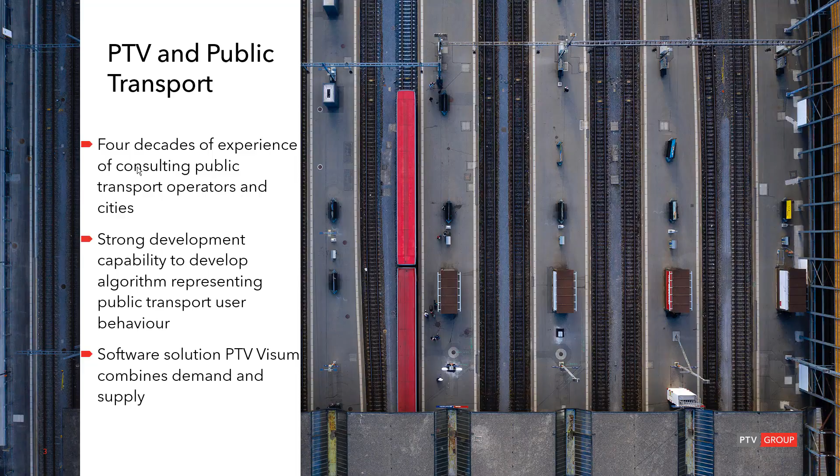So PTV Visum combines the view of the passenger with the view of the operator. It is bringing the demand and the supply side of a public transport system together. What this means, I will describe in the following slide. A transport model integrated in PTV Visum replicates basically the behavior and the choices when PT services change. Depending on the attractiveness of the system, the alternative options and the choice behavior of the population, the passenger demand can then be calculated with the transport model.

Based on the demand, you can determine a timetable and optimize your vehicle scheduling. When you look at your vehicle scheduling, you might find a better timetable to reduce the number of vehicles and therefore reduce your operational cost. So basically, the software allows you to attribute the cost to specific services. By reducing or increasing the number of services, you can then see the impact on the demand.

So PTV Visum can help you to balance, on the one hand, the impact of the operational optimization to reduce your cost, but also how to improve your system to increase the number of passengers. So it's basically a balance. Once you optimize your service quality and have fewer services, it could happen that because of the fewer services you have fewer passengers, but it all can be balanced out with Visum.

Before we discuss our 10 key topics, I'd like to hand over to Sebastian, who will provide you with a general overview on PTV Visum with public transport in a live demo.

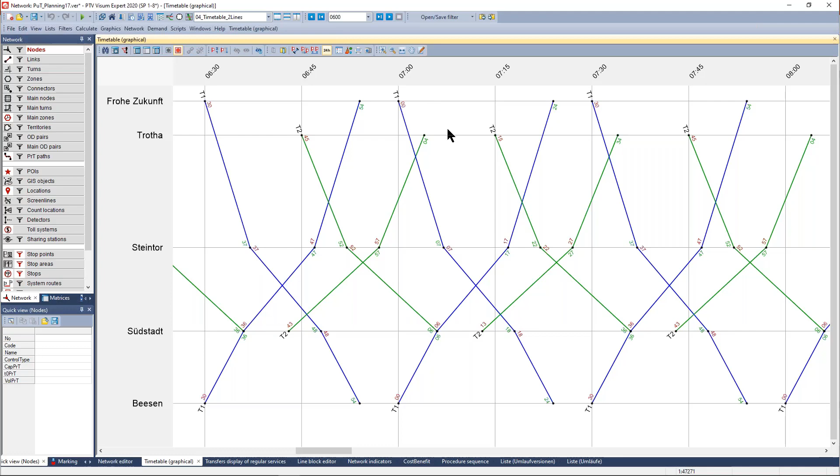This is our graphical representation of a timetable, and here you see two lines, a green line and a blue line, with selected stops of their journey. You also see the arrival and departure times. In addition to this, we have something we call a schematic line diagram. It visualizes the supply in a schematic manner.

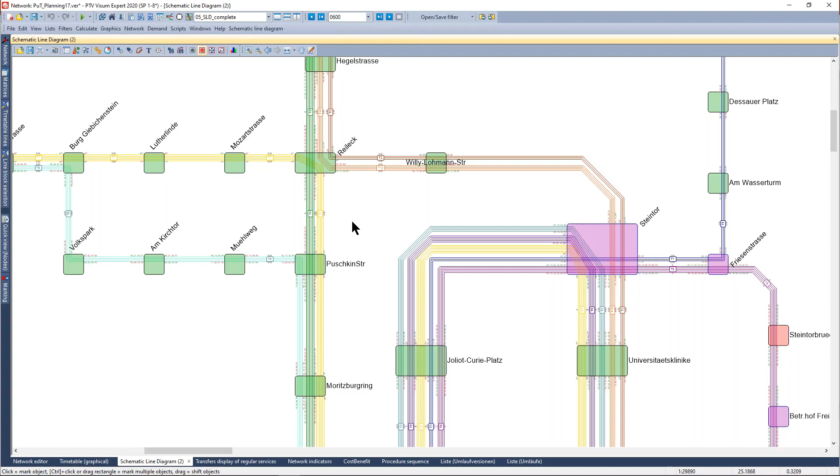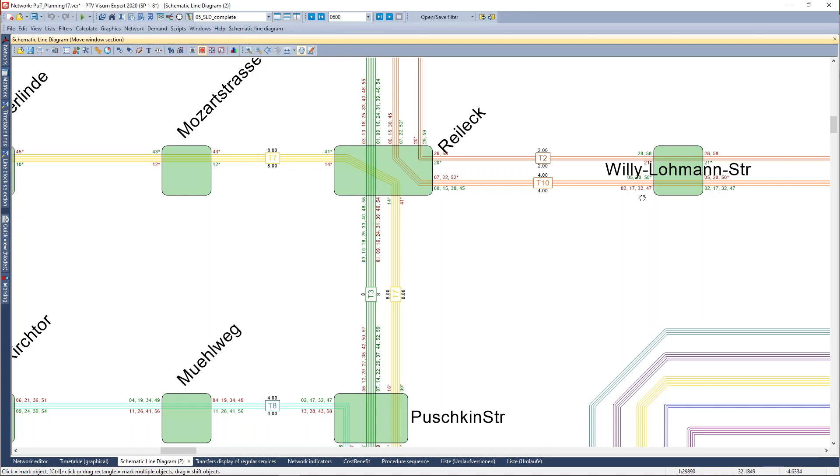If you want to plan your supply, you want to have the stops, the frequencies, and the connections in mind. This schematic line diagram summarizes all this. The width of the edges depicts the frequency of the supply. The figures at the stops represent the arrival or departure minute of the journeys, and this makes it easy to assess the transfer conditions at each stop.

So this is short for the supply side, and of course we want to have a look at the demand. In a macroscopic transportation model, the demand is most times represented in matrices. Our small example here consists of 90 zones, so we have 90 by 90 OD pairs to fill. This data comes from passenger surveys or from classical demand modeling. If you want to learn more about this, you can have a look at our webinars about the survey data model.

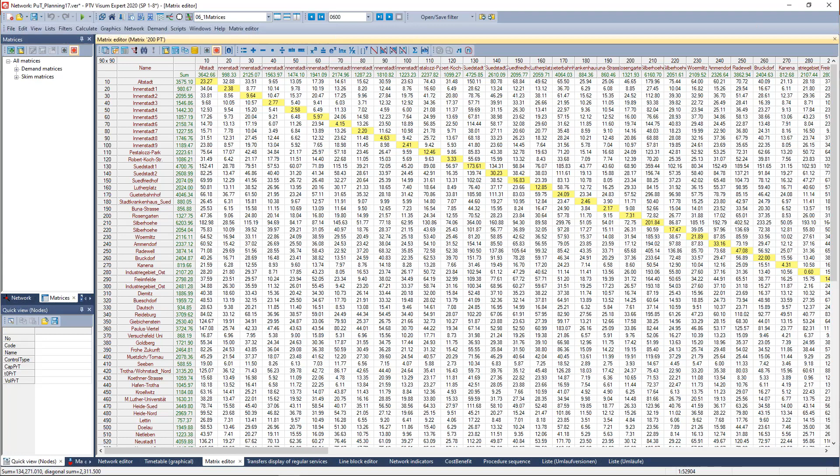Now we saw the supply and the demand and how they are represented in PTV Visum. Let us now switch to the assignment. The assignment brings together the demand and the supply. It includes route search, impedance calculation, and choice. To show this, I restrict the supply to two lines, the green line and the blue line, and I run an assignment.

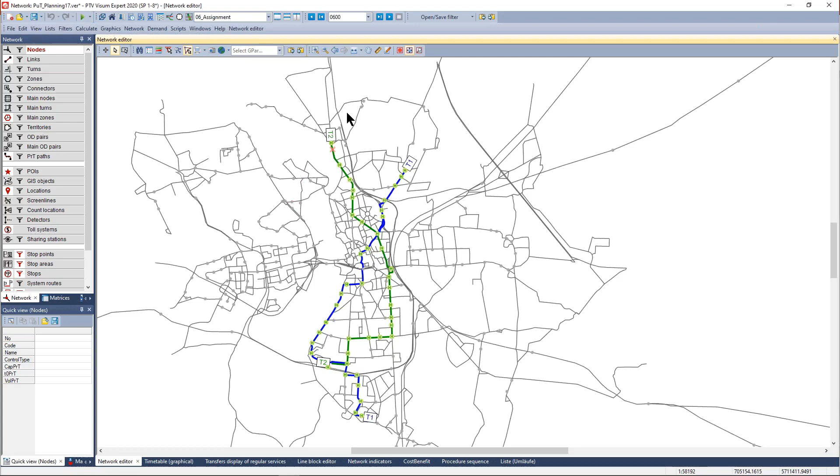The results can be accessed in multiple ways. Here you can see the most common way, with line bars, to see how many people are using the green line and the blue line. Our graphical timetable can also display the number of passengers using a particular bus or train trip, as vehicle journeys. It is color coded: green means every passenger finds a seat, orange means the volume is higher than the seating capacity, and red means the vehicle capacity wouldn't be sufficient for that amount of passengers.

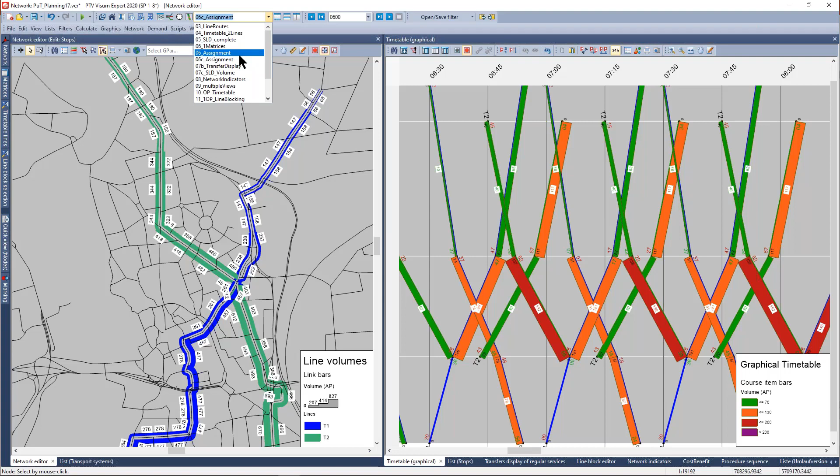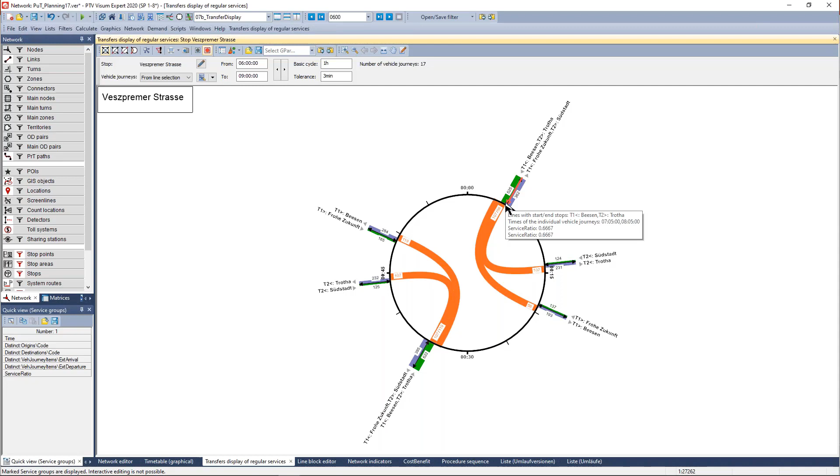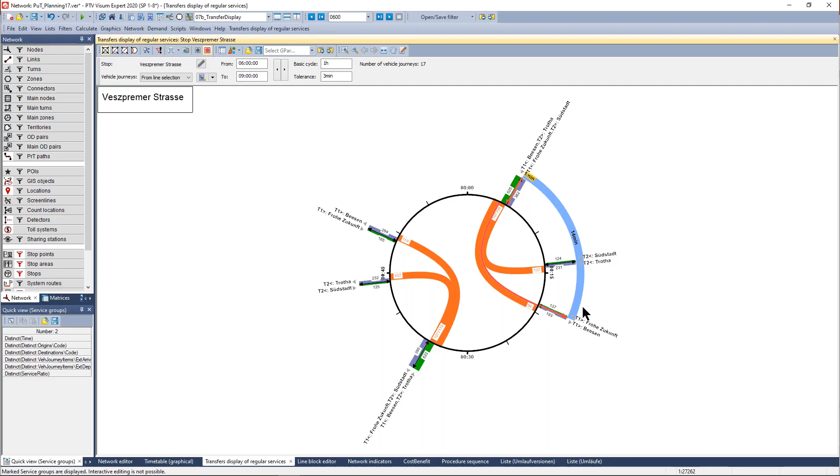If you are more focused on transfers, PTV Visum has something we call a transfer display. You see this on a stop level. This is kind of a clock where arriving and departure minutes are depicted in a circle segment. This is most helpful if you want to see the transfers. Here you see the time you need for the transfer, and then you see you have 13 minutes of waiting time for this connection, and how many people are using it.

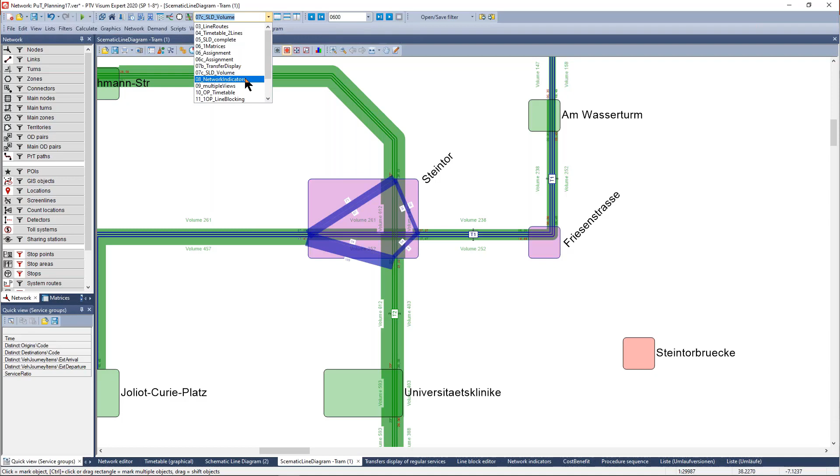If you have done an assignment, you can look up the demand in your schematic line diagram as well, and you can also depict the transfers here. Of course, these are all graphical visualizations without a lot of numbers, but you can access those numbers as well through what we call network indicators, so matrices and formula matrices. In this case, I put in the transfer time multiplied by the passengers, and you can access this for comparing scenarios afterwards.

And everything I showed you before is integrated in one program, and this comes with a lot of advantages. There is synchronization between all those views. So if I click here on different stops, the transfer display will automatically switch to the one. If I click here on journeys, you will see them in the network editor and marked here in the transfer display as well, and in the schematic line diagrams.

So synchronization is one of the main advantages, but more important maybe, everything here is based on one data set. So if you change something in one view, the results will be immediately shown in the other view as well. Okay, we talked about demand, supply, and assignment. Everything like this is the passenger perspective.

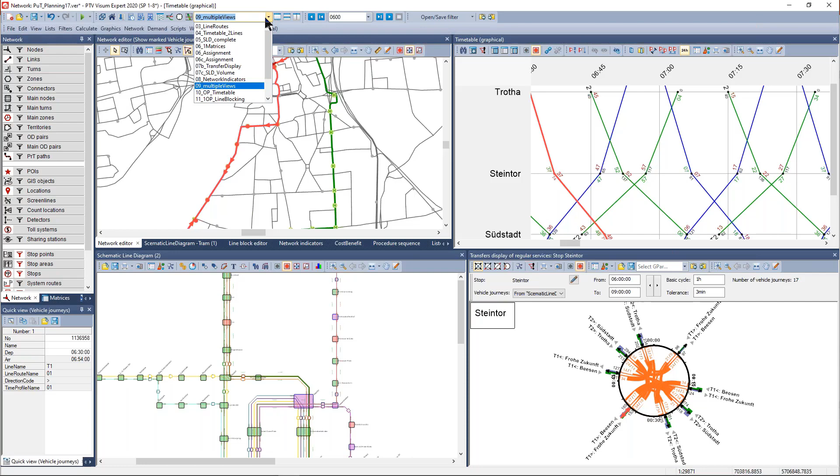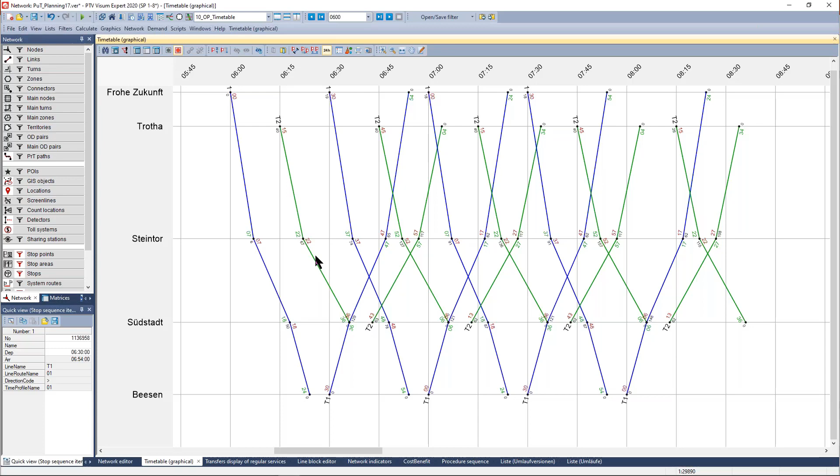But Visum, as Andreas already told you, also offers the operator perspective, and for this you see here the timetable, and this timetable is from the operator perspective a good timetable. You have enough preparation time for each trip, blue and the green line. But if you look up close, you will see there is an uneven number of green journeys in here. So if you see this as an operator, you know you have to have an empty trip or a dead run in your system, and that's exactly what we can do by line blocking.

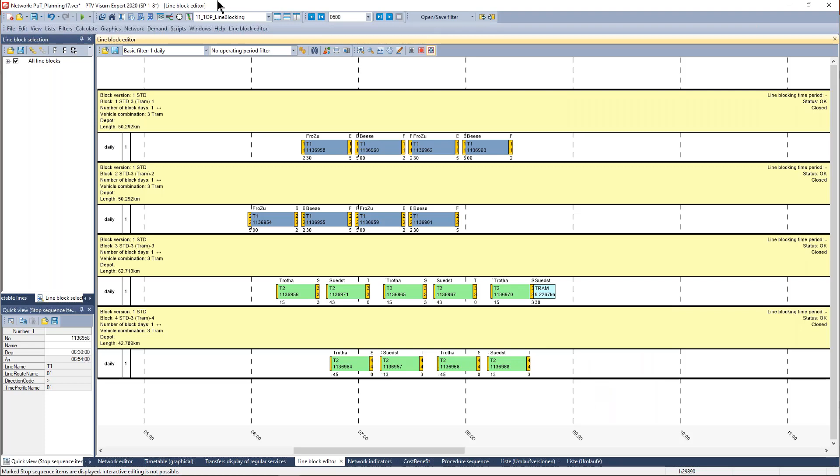We can calculate how many vehicles are needed to operate this timetable. And by this, you can estimate the cost of this timetable. In here, this is our line block editor, or maybe you know it under the name vehicle scheduling. You see, with 4 vehicles you can operate this small timetable, and you see here the dead run for the green line. And of course, results like this you can also look up in your timetable to see which bus operates which journey in your timetable.

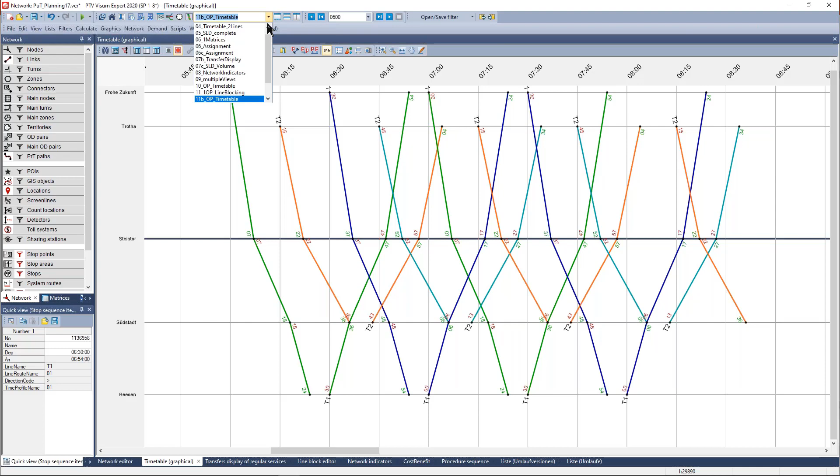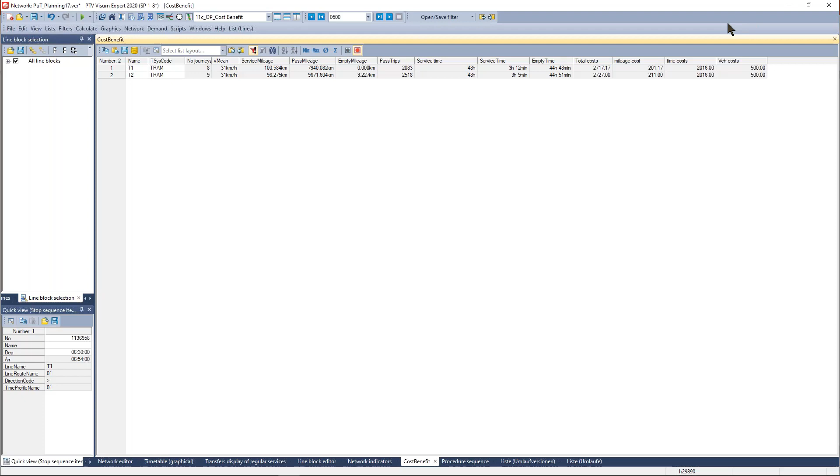Okay, and of course, if you have the number of vehicles, you can estimate the service mileage, the empty mileage, the service time, and of course the mileage cost, the time cost, and the vehicle costs. So you know what your operating cost is for having this timetable in place. Okay, and we saw we have about 500 money units of vehicle costs in here, and I want to show you a short example of how to optimize all this.

So what we see here is, as I already mentioned, a good timetable from operator perspective, where you have enough preparation time for each journey. But if you want to transfer at this major stop Steintor here, there is a lot of waiting time involved for the passengers. And if we want to reduce this, we can change the offset of the timetable. And you immediately see there is something happening in our line blocking. And last one here. Okay, and now every trip will meet each other at Steintor, so the transfer time is minimized.

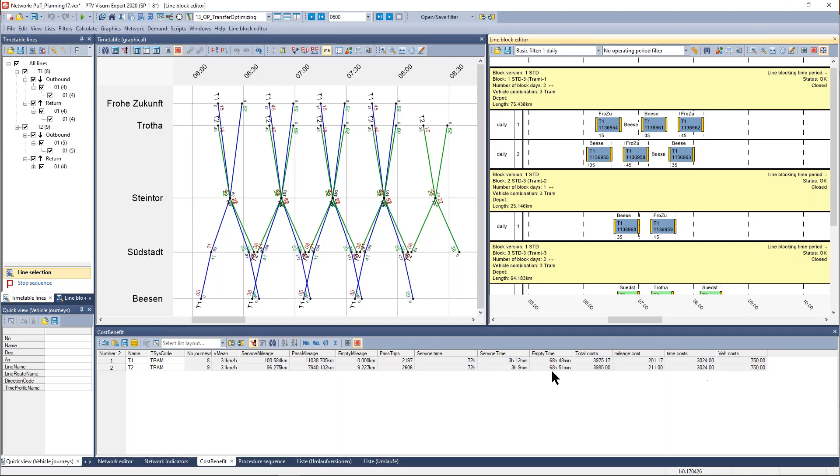And when I now rerun the calculation, you will see I need 6 vehicles now. And this will, of course, bring up my vehicle cost to 750 money units. So you see what it costs more in operation, but you can also look up what it will gain for the passengers. And you see there is something about 60,000 or 70,000 minutes for the passengers in your network for that amount of cost, and then you can decide whether it is worth bringing this to the passengers or not.

So in summary, Visum does not only provide the complete set of the user perspective, but also provides multiple tools to assess the operator perspective. For optimizing your project, you have to take both into account. Okay, this was a very, very short overview. I will hand over to Andreas to give you more insights in this.

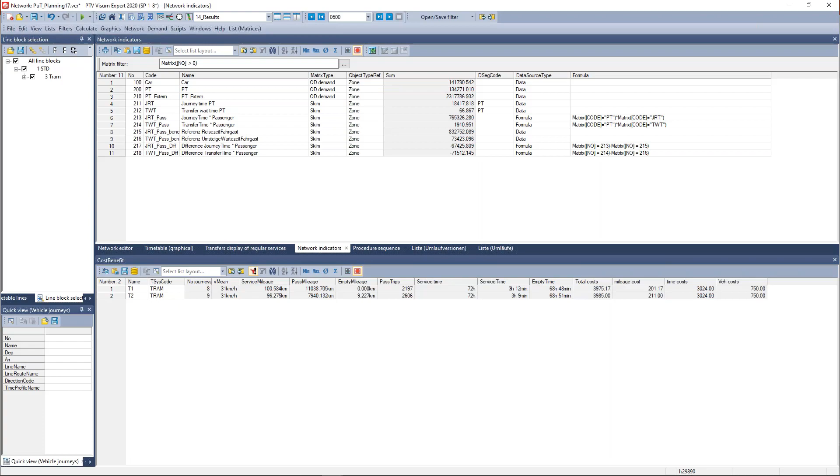Thank you, Sebastian. Now I need to get back to show my slides. Sebastian, can you see my slides? Yeah. Okay.

Now we'd like to investigate the 5 key topics of high relevance for operators to optimize their operation for their customers and also for the whole environment. The first topic is strategic rolling stock investment. Then e-mobility, where we cover the conversion of buses to electric buses. Then we will discuss how we can help improve reliability and punctuality in the public transport system. This will be followed by the design of a pedestrian-friendly station. And the final topic of this first block will look into improving fare systems. Then a second block will look into sustainability. All right, let's talk about rolling stock investment.

Matching your rolling stock to your future demand is a challenge. Well, you need to find the right amount of vehicles for your rail services that makes you stay cost efficient and also pleases demand. So our customers are using PTV Visum to ensure investment reliability by examining the optimal length of the carriages, considering also the profitability and how the vehicles will be used. Well, Sebastian, can you please provide an overview on how this works in Visum?

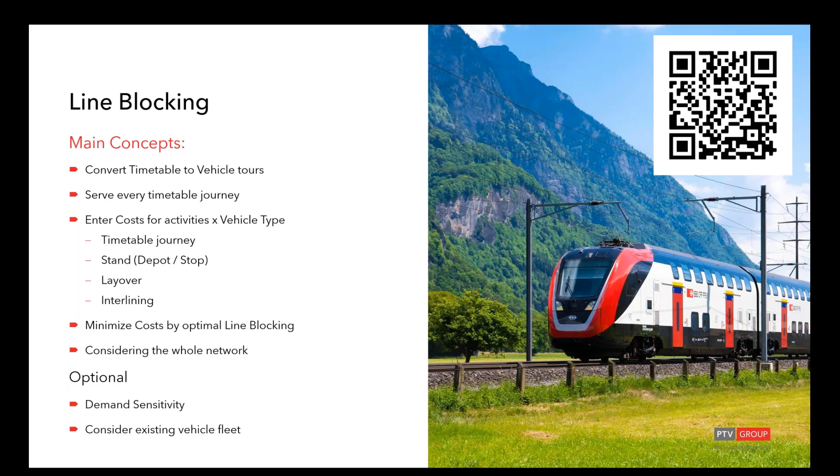Okay, thank you for this overview. As we said, it's just a quick overview of the topics, and you have the specific technical webinars to go deeper into the subject. Now we'd like to move to the subject of e-mobility. E-mobility can help to make our cities more livable. This accounts for public transport, also for private transport, and in particular for new forms of mobility like ride sharing. In terms of e-mobility, we as PTV work in many areas, also in the area of finding the optimal place for charging locations.

But now we talk about public transport, and we'd like to focus on what is a key question for operators. So the question would be if they still can operate their network with e-buses as before. In some cases, it makes sense to redesign the network to align the routes with charging locations. Sebastian, you delivered a webinar on this topic recently. Can you please summarize the key points for our audience today?

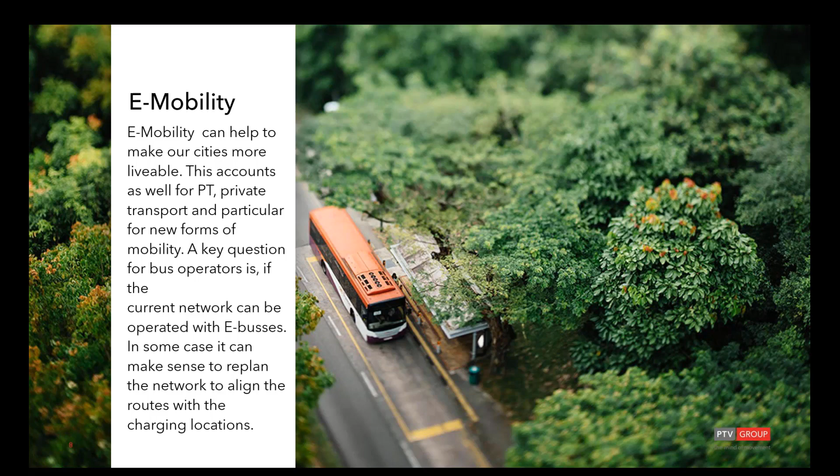Yes, of course. Battery electric buses do not pollute the city and they are quiet in operation, but come with two major drawbacks. In comparison to diesel buses, their range is of course limited and the refueling lasts longer or must be done more frequently.

In the EU, there is new legislation in place, and in other countries there will be something similar. The so-called Clean Vehicle Directive defines how a clean vehicle is fueled, and it gives a minimum quota on low or zero emission vehicles in procurement from summer of 2021 on. So given this time window, the operators have to plan and act now, or at least take the first steps in this planning change. And for this planning, those questions I write down here have to be answered.

So which kind of system do I need? Do I need trolley buses, battery buses, or hybrid buses? Which kind of configuration for a vehicle do I need, and how many of them do I need? How many charging sites and what should be the charging power of those sites should I plan for? And yeah, do I have to really redesign my network? To answer this, could you go to the next slide, Andreas, please?

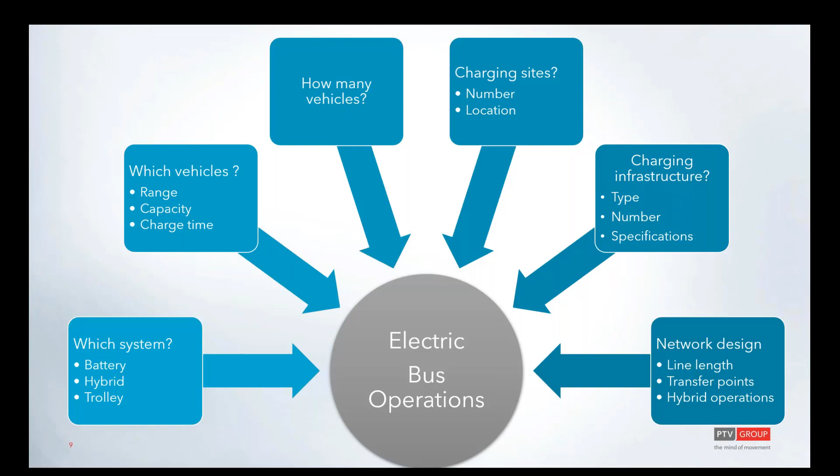Yeah. To answer this, we introduce the range and the charging requirements of battery electric buses into our vehicle scheduling. You see here this line blocking editor, now color coded by the charging state of a bus.

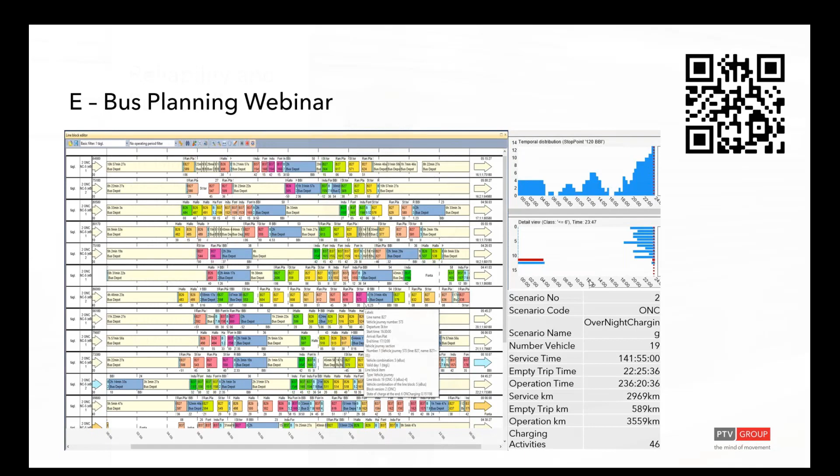All right, thank you. Let's move to the subject of reliability and punctuality. Punctuality, reliability, and journey times are very important for the passenger.

But there's an issue. Generally, the KPIs an operator measures for punctuality are based just on the timetable of trains and not on the journey time of the passenger. This could lead to many missed connections, as trains won't wait for connecting passengers, just so that the operator wants to meet their KPI.

It's also important to have the passenger view and gain an understanding of if a train should wait or not. To optimize the reliability of passenger journeys, it's important to understand what other options are available if a connection is missed, because in some cases it doesn't make a lot of sense that the train waits when there's another connection in 10 minutes available. In other cases, the passenger has to wait more than an hour, so it's really important to understand how important certain connections are and look into the history of how reliable these journeys were.

So, Sebastian, what can we do with Visum in terms of reliability and punctuality? Yeah, Andreas, as you say, the reliability of ride time and waiting time is an essential quality criterion for public transport, not only for trains, but as well for buses and city transportation.

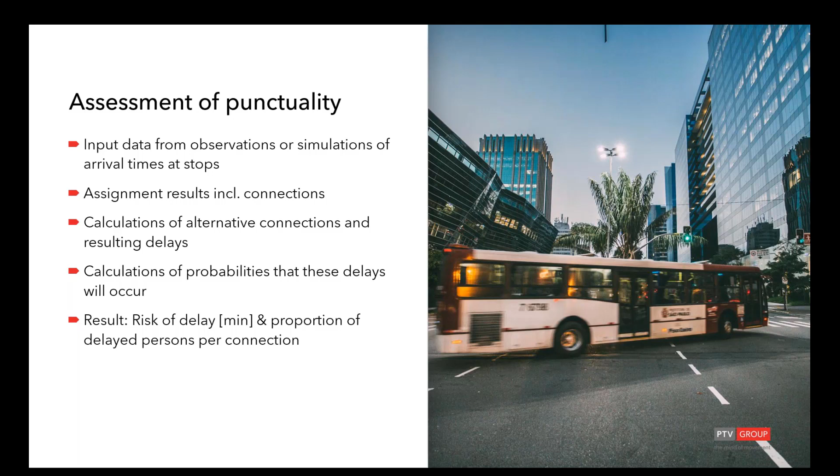And if you can switch to the next slide, you can see an example of a bus lane which increases the probability of punctuality. You see the green field is the yield from this measure. And of course, these things can be measured in travel minutes, and this can be monetized, so you can see what is the benefit of measures which do not improve the riding time, but the robustness of your timetable.

All right, and of course there is a short example for this via this QR code again.

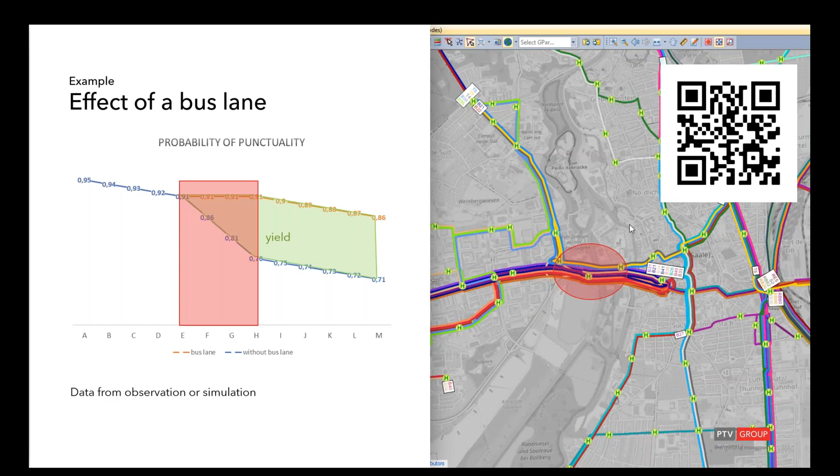Thank you, Sebastian. Okay, now talking about reliability, an operator also needs to consider pedestrian-friendly station and vehicle design. While good station and vehicle design is important for smooth movement of passengers at transport hubs, crowding can become an issue and lead to unstable operation of the system, particularly during construction periods, crowding is a very big issue.

In order to create a good station design, we need to look into pedestrian engineering. Pedestrian engineering is about creating space that allows people to move freely and efficiently whilst optimizing the space available. It is about designers, architects, and engineers being able to assess and validate, from start to end of a project lifecycle, how public space will work in practice for visitors, be it airports, a railway station, a sports stadium, a street crossing, all the way to a simple footpath. It is a discipline within transport engineering that focuses on the most prevalent mode of transport: walking.

Basically, pedestrian engineering includes pedestrian simulation, and pedestrian simulation is about investigating current planning issues and getting aware of planning issues as they become apparent in a simulation. It sets the planner's mind in the right track.

Our tool to simulate pedestrian movements is PTV Viswalk. PTV Viswalk is based on the social force model. The social force model calculates the force placed on a pedestrian at any given time by their desire to reach the destination and the influence of other pedestrians and barriers such as walls and buildings. PTV Viswalk can be used as a standalone product or in combination with our micro simulation software PTV Vissim.

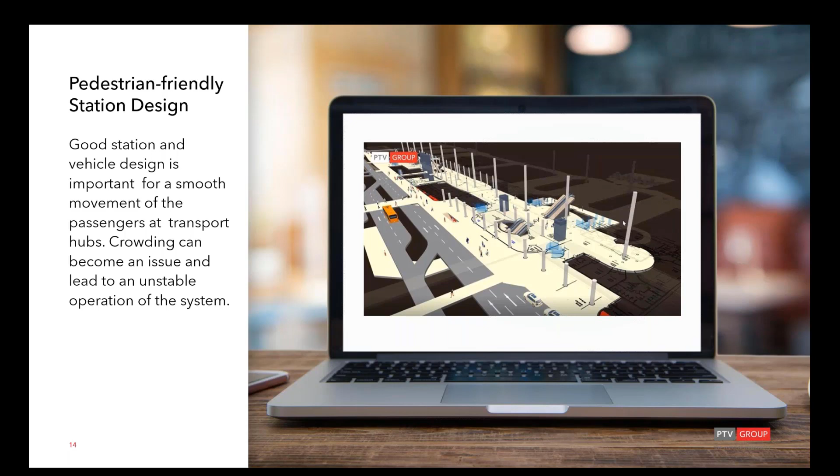Now I'll focus a bit directly on the station modeling. The success of public transport interchanges really relies upon fast and efficient pedestrian interchange from one form of transport to another. So with PTV Viswalk, you can accurately model the interchange between the different modes, so any change in one will affect the next one and so on. It is also relevant for evacuation planning, and since our latest version, Viswalk 2020, it includes also a fire dynamic simulator.

So Viswalk produces a variety of outputs such as journey and interchange times, levels of density experienced, queuing times and queuing densities. And of course, you can make really good movies to see how the pedestrians move around the station and to see where the issues are, and to present these movies to decision makers.

For those who like to learn more about Viswalk, there are plenty of recorded webinars on YouTube available. That's really where you can go into the details of this subject.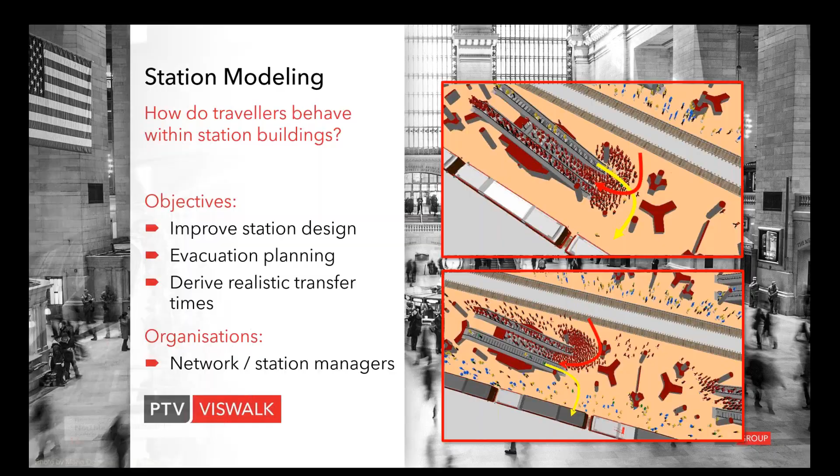Regarding friendly station design, I'd also like to mention a specific application of our real-time forecasting tool PTV Optima. It can be used to expect congestion in trains and stations and help to mitigate it. With PTV Optima, you can combine various data sources like onboard counting systems, alighting and boarding counts, data from platform cameras, data from gates, passenger travel times and pass information, and vehicle positions.

The data can be used to monitor and also forecast the queues at the platform, onboard crowding on the station, and you can also calculate probability of failed boarding. This information can then be used to provide real-time information to the passengers and also to make the right decisions in your operation. So that's a tool where we are in the area of real-time information for passengers.

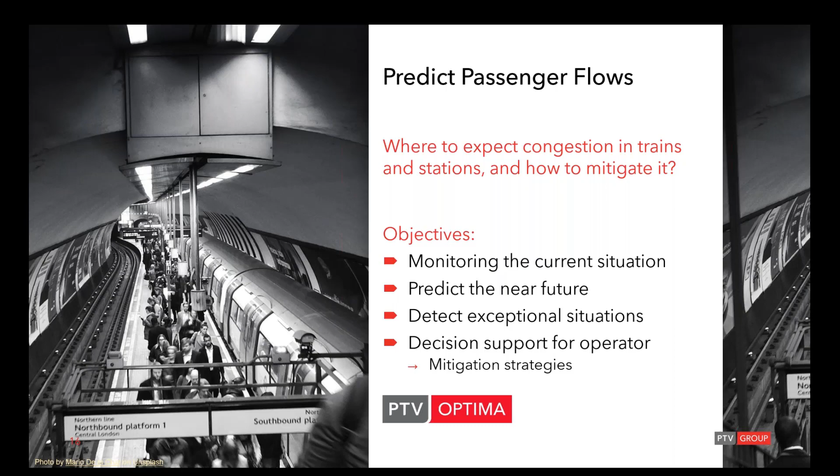Now I come to the last part of the first main section. It's about improving the fare system. Here in Germany, we have a strong political discussion to create a more attractive public transport system to meet climate targets, leading to a simpler tariff system. So they speak about a 365 euro ticket.

So it means you just pay 365 euros a year, basically €1 per day, and you can use the whole system, which would mean a very strong reduction in the pricing. So the responsible organizations and operators need to understand how this will impact the income. So Sebastian, what are your thoughts on improving the fare systems, and what can you do with Visum on this?

In the last days or weeks, Luxembourg gave us a good example for that. It's the first country which provides nationwide free of charge public transport. The annual cost for this is about 41 million. And of course, with PTV Visum, you can on the one hand model all kinds of fare structures and are able to compare different fare structures with this.

How to do this? You can look up again the fare example, public transport fare example within your Visum installation. But maybe more important, besides the fare modeling, it can also be part of the demand model. And by this, you can not only calculate the fare income, but how people react on changing the fare.

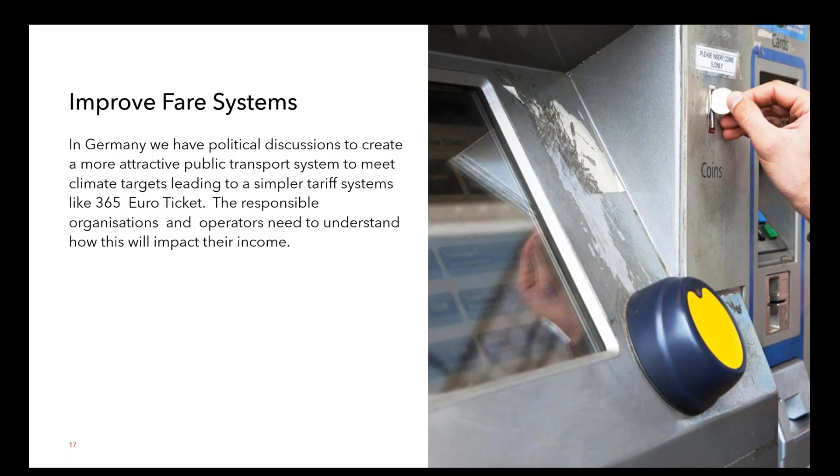Oh, thanks a lot, Sebastian. I think with these five topics, we really wanted to look from the operator perspective on public transport. Now we move to the next top subject, which is sustainability, which is really one key topic, and public transport plays an important role for a sustainable transport system.

So here we'd like to broaden our perspective, and we want to look also into things like active mobility, like walking and cycling. We want to talk about the role of public transport in a multimodal transportation network, also put our view on the whole transport system and how we can make it more eco-friendly. Also, the subject of accessibility plays an important role. And at the end, we'll say a bit about generally expanding the public transport system.

So let's start with active mobility. When we speak about public transport, we also need to consider the most important access mode, walking. But it often makes sense when we look into public transport to also consider cycling and walking, not just as an access mode, but also as a mode from origin to destination. In Germany, we speak about the word Umweltverbund, which could be translated as an alliance for the environment. So improving the available infrastructure for active modes like walking and cycling is very important to shape a sustainable city. In order to increase the usage of these active modes, cities have to offer a consistent cycling and walking network. So Sebastian, how can PTV Visum help to model cycling and walking?

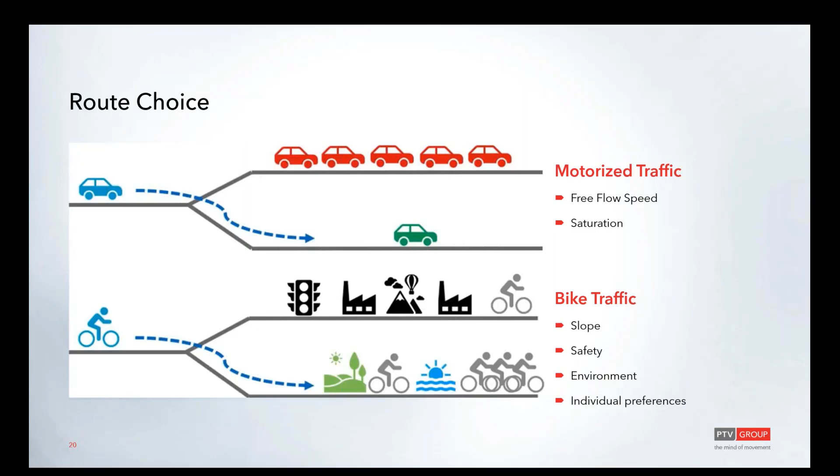In addition, can you go to the next slide please? We did a project in Copenhagen back in 2012, where we simulated different infrastructures and traffic engineering measures in the capital of biking, Copenhagen. This used PTV Vissim's microscopic simulation tool to depict realistic traffic states on planned infrastructure. I already linked a webinar done last week by my colleague Marianne Petersen about modeling bike traffic in PTV Visum.

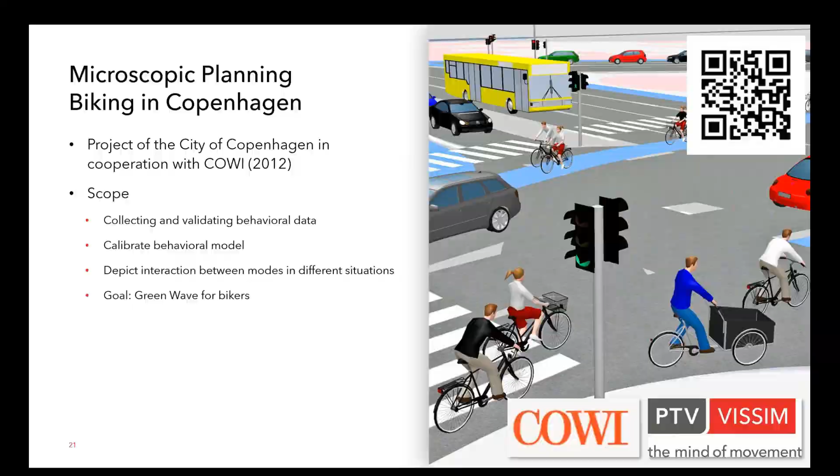Coming back to this, it's not just cycling and walking, it's the whole multimodal transportation. With PTV's software, you can plan a holistic transport network considering all modes of transport. In particular, the impact of new mobility solutions can be assessed. When you understand the range of results and which assumptions have greater or lesser influence on the outcome, stakeholders can make important decisions with increased confidence.

Sebastian, can you please elaborate on PTV Visum's capabilities to model multimodal transportation, and explain how the software was developed over recent years?

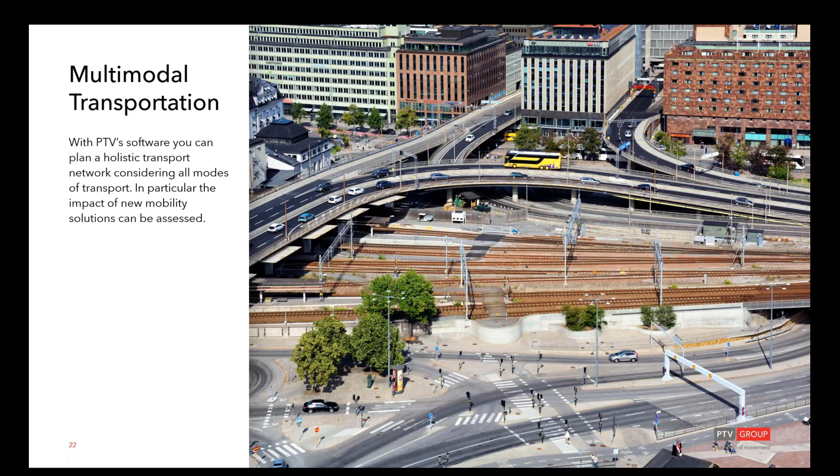Of course. Modeling private and public transport, including bike and pedestrian traffic, is the core competence of PTV Visum. In recent years, we've been working to introduce all upcoming modes within our software solution. Those modes are often in public discussion and politics. We always try to provide a solid base of numbers and calculation for this discussion, replacing the gut feeling of politicians and decision makers with a sound foundation.

We've done things for biking. In 2017, we introduced functionality to include vehicle sharing, so car and bike sharing or scooters in our traffic models. In 2018, we introduced a dispatcher algorithm within PTV Visum, and now we are able to model a ride-sharing service within a macroscopic model. This enables you to estimate the demand and, more importantly, estimate the mode shift.

So who is using those new modes like ride-sharing? This gives you a clear picture of the sustainability and a sound foundation for required regulation which might be needed.

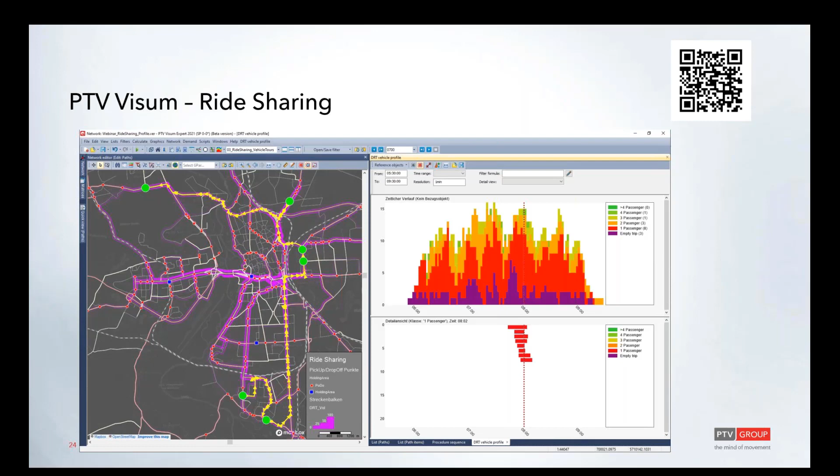Okay, thank you very much for this. Now let's talk about the eco-friendly environment. While old school transport planning focused on providing infrastructure and services to match demand, today's planning needs to focus more and more on the impacts of traffic to create an eco-friendly environment. It's about road safety, noise reduction, air quality, and environmentally friendly traffic management, which are key for sustainable transport planning.

Demonstrating the effectiveness of strategies and measures based on a valid quantitative assessment plays a very important role in the decision-making process. By using PTV software, you reflect those aspects in all strategic planning concepts. We'd like to give you a quick overview of the tools we provide to analyze traffic-related pollution on one hand, and road accidents on the other. Sebastian, please.

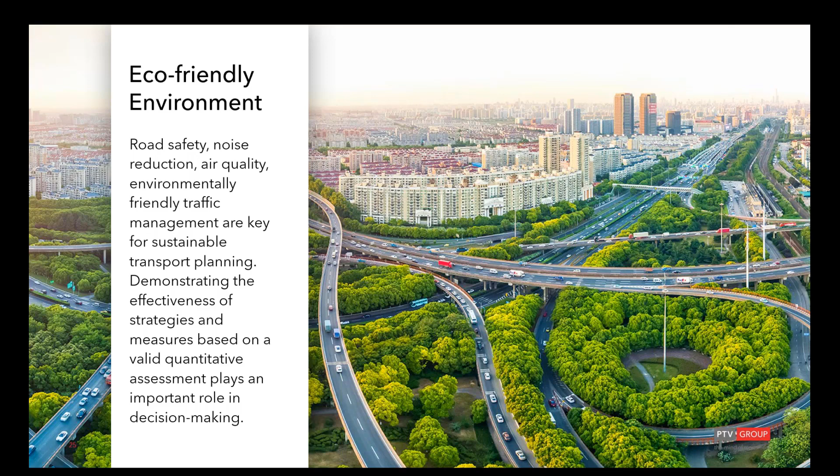Yeah, of course. Here we can offer again to watch a webinar held some weeks ago on the latest release of HBEFA and its integration in PTV Visum. With this, it's possible to calculate the tailpipe emission based on volume, fleet composition, and traffic states. HBEFA data is predefined for multiple European countries and has a planning horizon up to 2050.

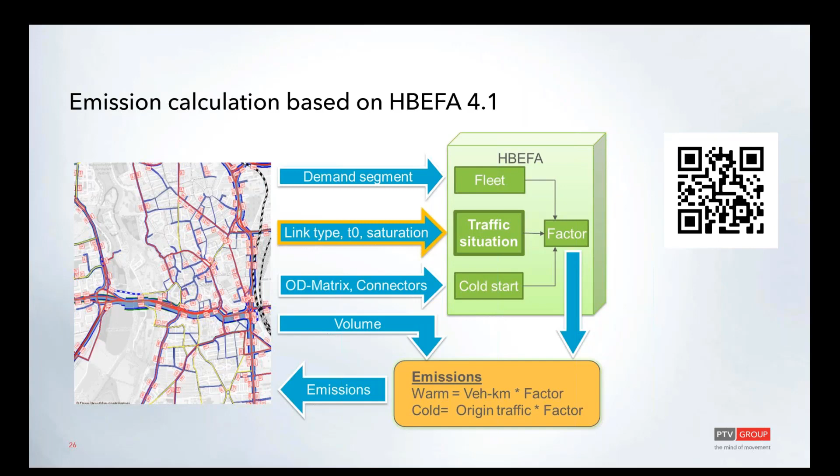The other point is safety. Here we offer the possibility to collect, visualize, and assess road accidents in our software solution. You can do black spot management, network safety management, and road safety impact assessments to forecast the safety level of your infrastructure.

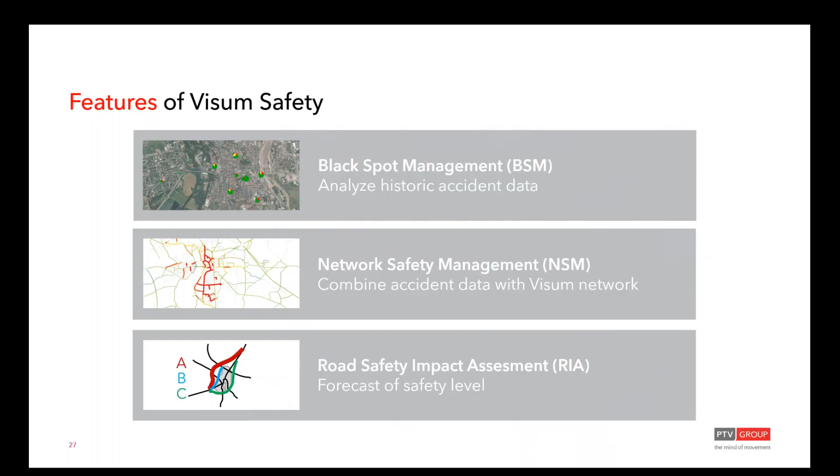All right, thank you. We also like to mention the topic of accessibility analysis, because the location of shops, schools, and leisure centers being well connected to a good public transport system is really important for a livable city. Cities and communities are the center of social life and the economy. Therefore, the accessibility of transportation is an important aspect in the quality of life.

And for a city, it's important to understand the impact of, for example, closing certain areas or having fewer medical offices, which applies less in cities but more and more in rural areas, and then to still serve the communities well with the right level of public transport. By using PTV software, location analysis can inform about transportation shortages and point out action fields for a city to optimize the transportation network. So, Sebastian, how does this work?

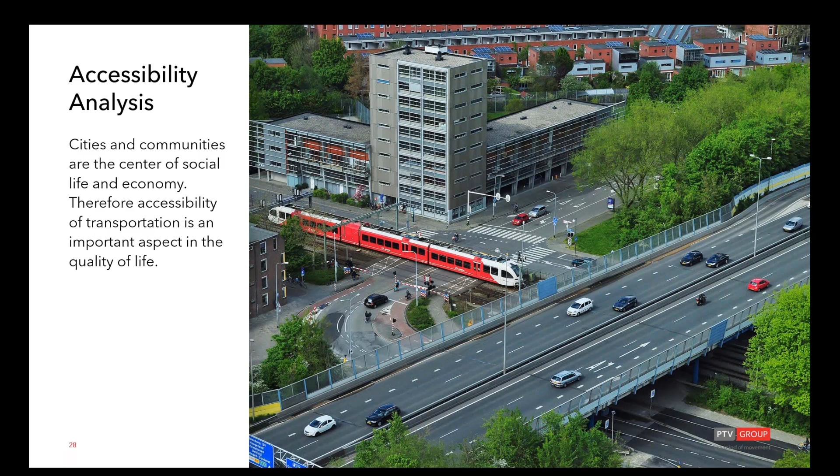Right. Yeah, the calculation of accessibility is most times done by travel distance or travel time. And with Visum, you can utilize the traffic model and its supply for this calculation. So you can define the impedance on which the accessibility should be calculated. For instance, in public transport, the number of transfers plays a crucial role, or think about the headway.

All right, thanks a lot for this. Let's move to the last point, which we called expanding public transport. At least before COVID-19, Europe's investment in public transport and rail systems was constantly rising. And the challenge for operators is to invest in the most effective way, as they must be profitable whilst pleasing the customers. So they are looking for a cost-benefit analysis. This is where PTV Visum performs to understand different planning cases and adjust the timetable.

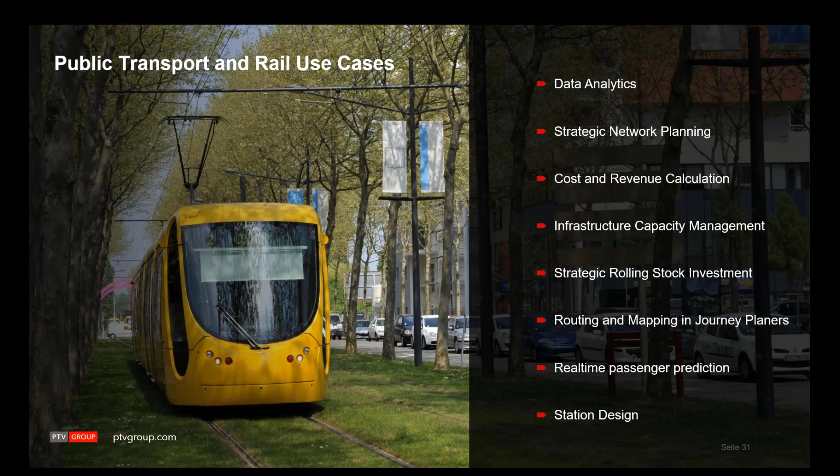On an example, I will also show now this point about routing and mapping and journey planner. So we also have a few real-time applications which can be used for public transport management, and also the real-time passenger predictions, which I described in terms of designing stations. And the last point here is the station design. So I will follow up with 3 examples of key clients we are looking after.

So one of our key clients using our software for public transport planning is BVG, the transport operator in Berlin. They used PTV Visum to plan new infrastructure for Berlin's underground and tram network. They also analyze the whole city to see what is the proportion of passengers they already have, where it's maybe possible to win more passengers. And 2 years ago, we also applied a new application of our software, the PTV MaaS Modeller, to introduce BerlKönig, which is an on-demand ride-sharing service in Berlin.

Now I move to the Swiss Railway, which was already mentioned in this webinar, as they use our software for the strategic investment of rolling stock. But they do much more with our software. They use it for the timetable planning, so they finalize the timetable. They use the schematic line diagram Sebastian presented at the beginning of this webinar. They also use our software to model the demand over the whole course of the day, so not just an average hour of the day, but really how the demand changes during the course of the day.